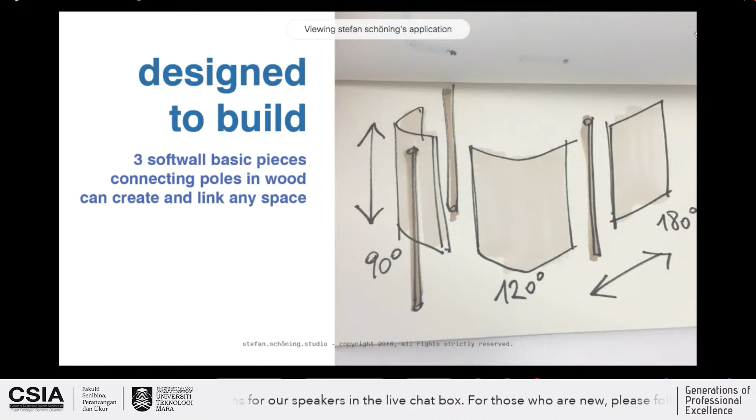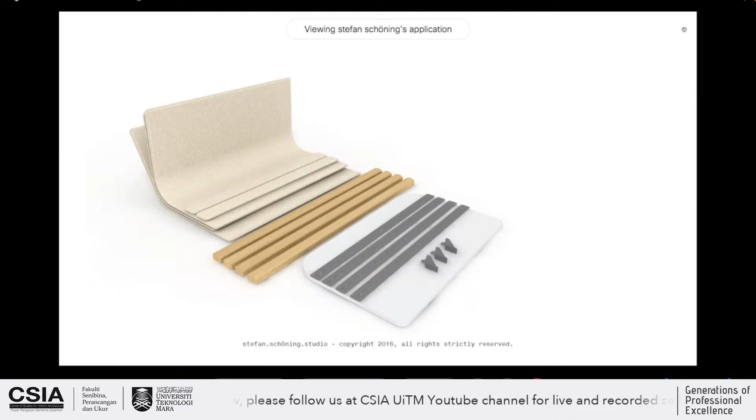Meaning that we made a system of soft wall panels, basic pieces in three forms, which can be connected with poles in wood, especially local wood, and then they can create any link in any space. So in the end, we came up with this kind of result, which looks quite easy because the basic forms are simple, but the result can be any kind of configuration.

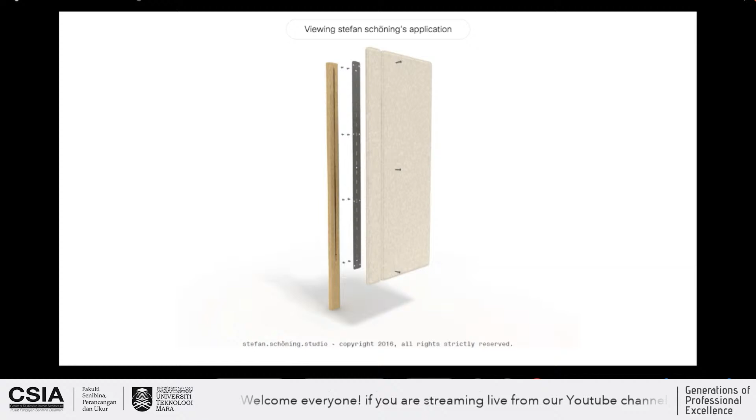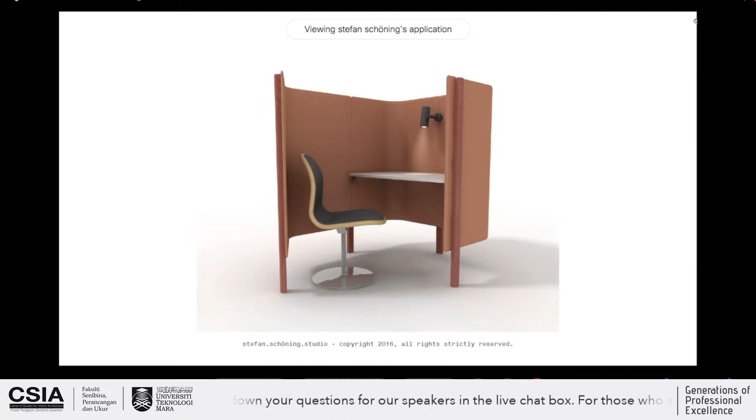This is the more technical part which we'll look at deeper in another presentation. As you can see, with the simple connection of an intermediate panel, we can connect all the pre-made pieces into a shape of a small breakout place, or maybe another color, or with a lamp, or with a stool, or a separate space, or a bigger space, in order to make a meeting or a presentation. So the principle is connecting different panels, straight panels and corner panels, into architecture.

The material for the panels, as I told you, sustainability is becoming much more important in the coming years and decades. We definitely try to find a material which is recyclable or even recycled already. For the soft panels, we found a material made from collected PET bottles, which are sorted and shredded, then needle punched into a non-woven insulation system. This is interesting because you can put it in a variety of different colors. It's environmentally friendly, lightweight, has a soft touch, and last but not least, good noise insulation.

For the wood, we think of course of local wood in Malaysia, which can be very attractive. We thought of Nyatoh wood. Nyatoh is a trunk which goes up to more than 3 feet in diameter, which is interesting to get straight pieces we need to make the connections, and it's a wood which is very regularly sourced in Malaysia.

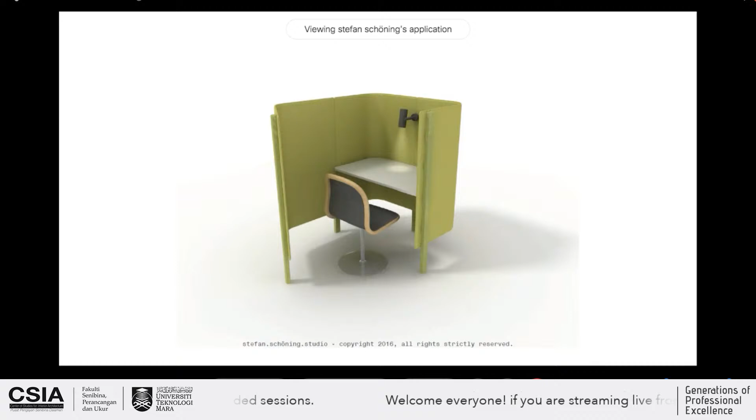So now, as you can see, we can make a connection between the different pieces and connect it to a bigger space, or another configuration with other connections, other colors, other functions. In the end, we came up with a whole different process of solutions for the office.

If we can go to the next presentation, it will show you the way it all came together. Do you see the presentation? Yes, we can see. Okay, sorry, just to check.

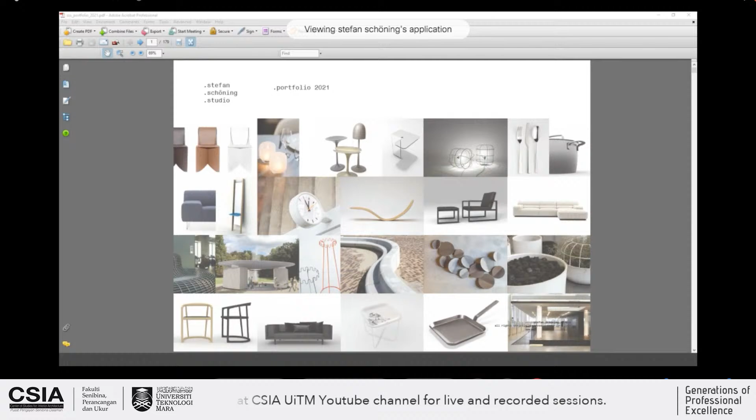So this is the same company. This was the briefing. As you can see, it's already 5 years ago, so some of us will be looking a bit more mature in the picture. The first thing we do is look into the company and get the briefing from the owner with his ideas. Then the first step we always do is take a deeper look into the company itself, to see what kind of machinery and process they have.

Sorry to interrupt, I think you're not showing the correct image. Let me check. I think the one that showed is correct. I'll go back then. Okay, yes, okay.

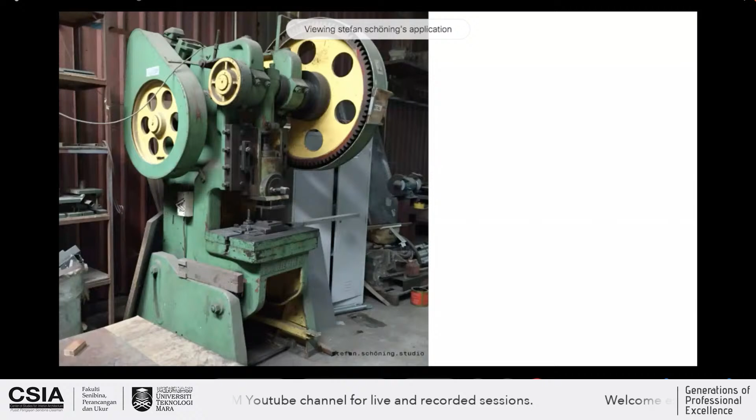So this is the start. The first thing we do is make a proper visit to the company and listen to what the owner has to tell us about his ideas for the briefing. But most important is that we take a deeper look into the production capacities of the company, what they can do in-house, what they can do out-house, and then we come up with the idea. We make a presentation, which I will show you in the third presentation of this zone.

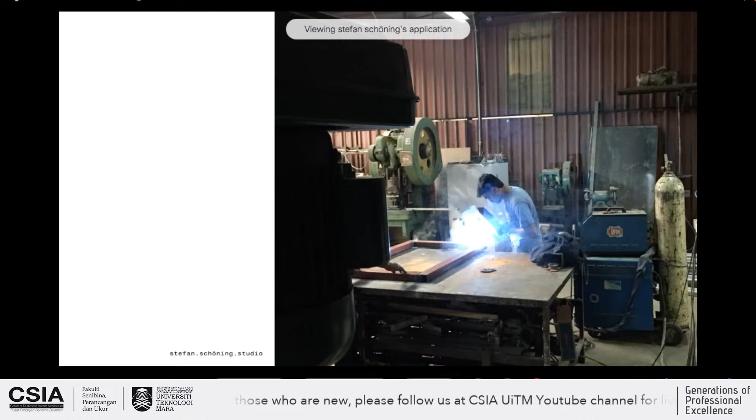So we make the technical drawing, the renderings, the technical details. Quite important in this situation, we make the sampling. Sometimes we use pieces we find on the market and integrate them, but sometimes we need to make our own pieces like this one, made in the company itself. So it's always a mixture of own production and supplying. The supplying mostly comes from the country itself, though sometimes the polyethylene fleece material comes from China. As you can see here, we started making the mock-up, the first tryouts, then made choices in the colors for the presentation at the fair, making the sampling of the panels, and finally the presentation at the fair.

So in the same way, I want to show you the presentation of how we came to the idea.

And what is this? What do you see at the moment? It's a white screen. I'm trying to.

Okay, you can see it. Can see, can see.

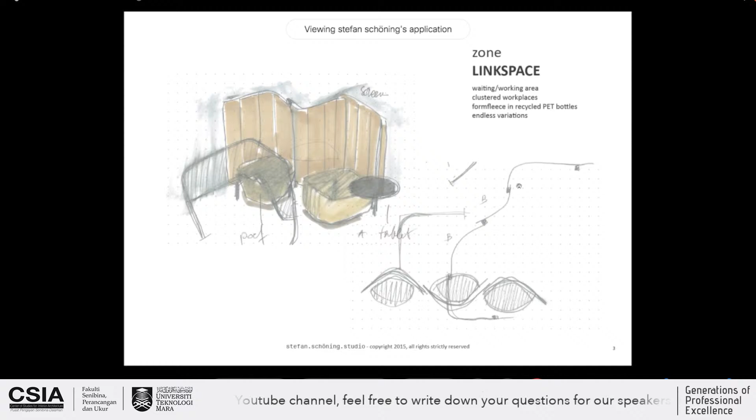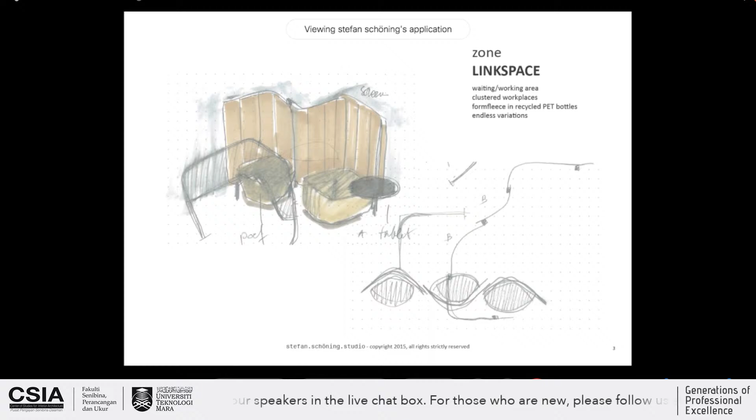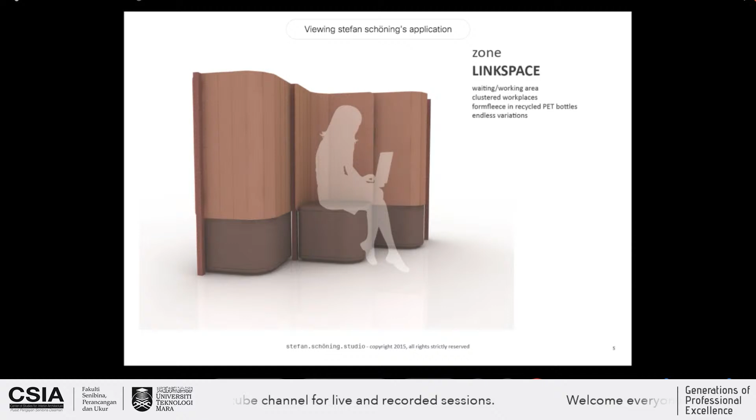So what we do is this is the result of the briefing we had earlier, and then we'd start to make the sketches. So all the way through, what I do today is go from the end result to the beginning, just to give you an insight of how we come to the result in the end. So in the first sketches and ideas, we were making these kind of sketches and presentations. And it's very important to get a very hands-on discussion with the client in order to see if what he has been doing in the briefing is one-on-one with what he has in mind.

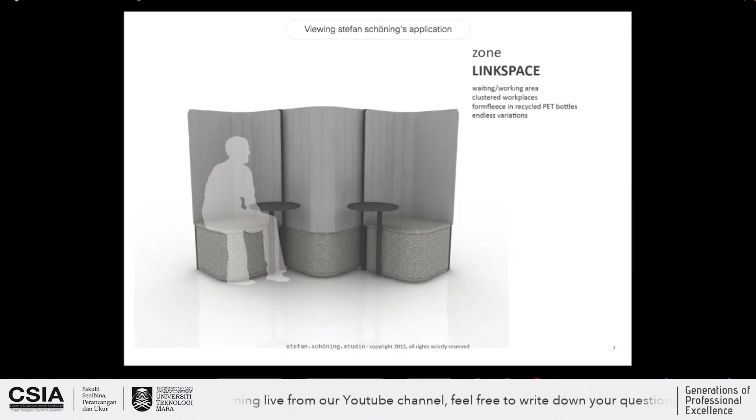Sometimes the briefing can change because we can have insights in the market or have discussions on market studies, which will result in a change of the briefing. But in the end we came up with a system which is kind of what we saw in the final presentation.

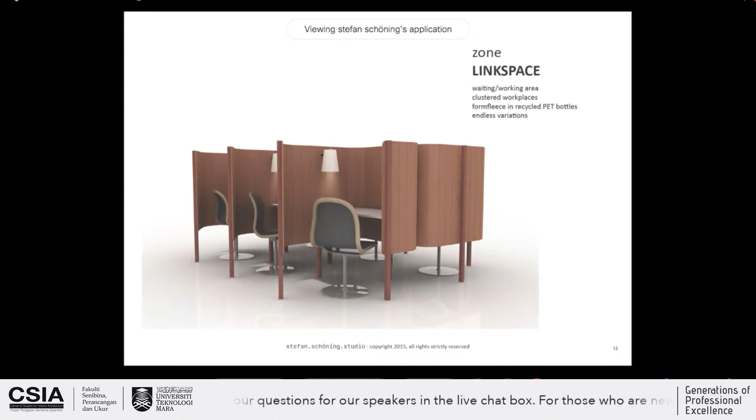Okay, do you have any questions on this, please? Because otherwise we will go and continue with the next.

I think what inspired you to use the Malay house as part of your design process? Actually, I was looking to make a panel system, which is a small kind of architecture in the office environment, and I wanted to make it lightweight in order to not overwhelm the interior design of the office, so that the panels can be mounted very easily.

And in order to find a formal solution, this is the right side of the brain, is about emotions and about inspiration. I was looking into the history of the Malay architecture, and what is very typical is that the Malay house on poles is different in any part of Malaysia, but it's always on poles.

So the thing is that the basic idea is applicable to all the regions of Malaysia, because the system of ventilation is the main cause, or the main reason, to put it on higher poles. And this is exactly what I wanted to do in the office.

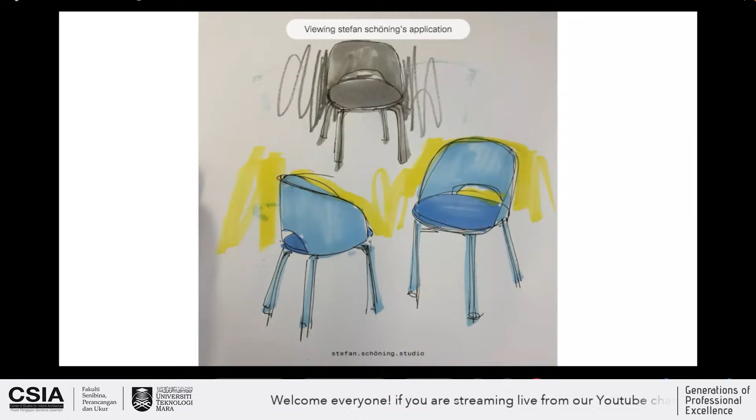So what was very important in this project was to make the curved piece connect to the seat without any visibility of screws, etc. This was the main challenge, let's say. The second challenge was that this kind of company only makes chairs which are knocked down, meaning the seat and legs should be disconnected and put into a smaller box to reduce shipping volume.

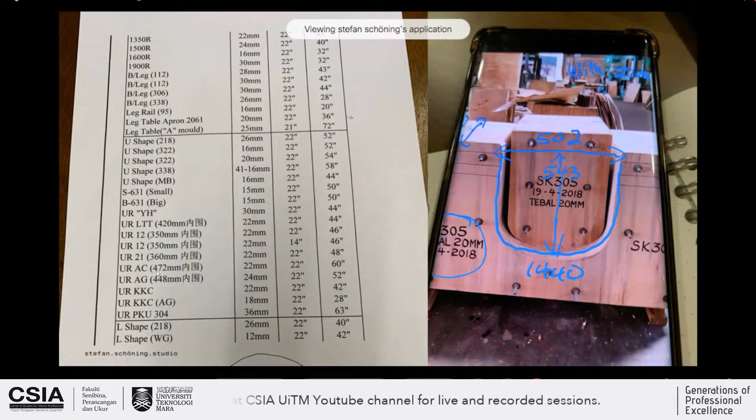So this is the result we came up with, the renderings and the product presentation. And we also make a presentation for press releases before the product is finished. So what we did is look into the data of the company making the curved pieces, and we picked out one or two that could be applicable for what we need.

And then we started making the CAD drawings in order to develop the right DXF files. We make the color scheme choices, and of course sometimes you need more clarification on how the invisibility of the connection is done. So this is the way we made the sketch, and then we executed this into the CAD drawings.

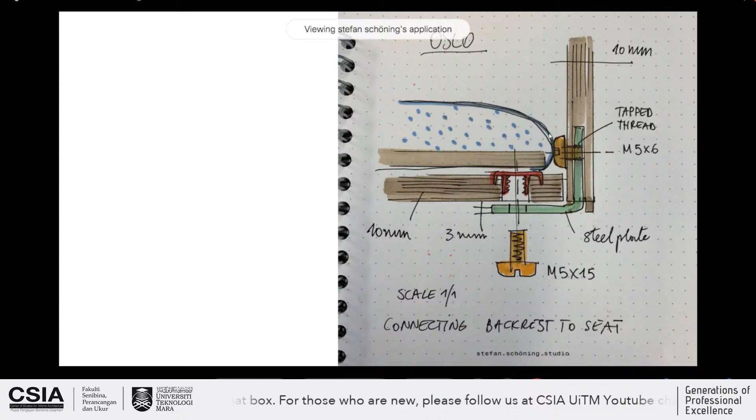So the interesting thing here is that the connection of the back and the side is underneath with a screw and a bolt here, and then the cover of the seating with upholstery comes on top, so you never see the finishing screws.

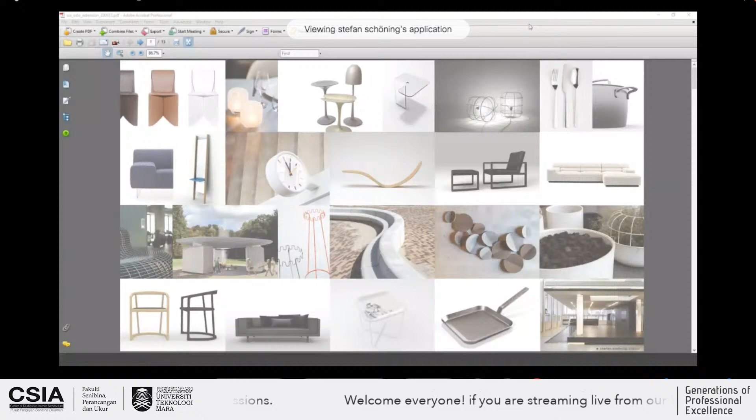What is interesting in this project is that we extended it to a bigger line called Oslo Extensions. What is Oslo extension? The extensions I'll show you immediately - when the product is successful, it's interesting to make a family, meaning a brother, a sister, an uncle, etc.

All right, so this is the basic product, and then we make the table, which is already an extension, then a longer table with different measures, a low table, coffee table, maybe a stool, as you can see here, or a small table and a bar stool - so in different sizes.

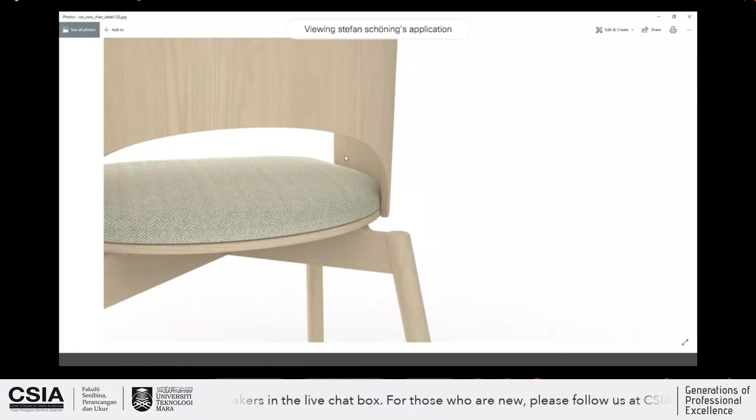This is very interesting because a little detail like this is very simple, yet you managed to do it with our local manufacturer, using a very thin sheet of plywood as the backing of the cushion while having the leg floating. Yes, correct.

I have to say this is the computer rendering; the final result is close, just a little bit thicker. Maybe I can show you the final results.

Let me check. Yeah, I think I have the Dan chair. This one.

To me, this is part of the design detailing that you're creating from your design idea, having it more like a detail design. Correct, the thing is you can see it, the chair. So as you can imagine...

This is the product. Yes, this is the picture, this is not a rendering. As you can see, we achieved quite good similarity with what we designed, and this is the success of the chair, I think, because of its characteristic floating detail, which makes people want to buy it.

That's right, it looks like the whole thing is cantilevered by itself. Yes, and there are different nice colors, and also the way the light comes through and shines on the back is a very nice detail. Also the legs, which are a bit set back, is also something.

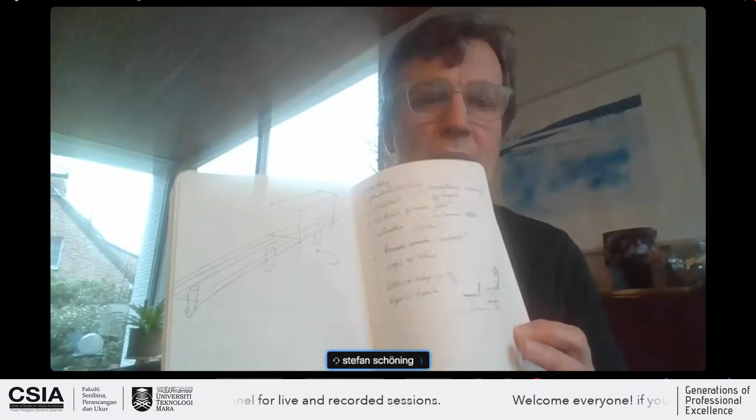This is very assignment related. On the other hand, we do also work from ourselves and come up with ideas, because as a designer you never stop sketching. As you can see here, I have this little book, and I always carry that book with me, and I always try to put the ideas which come up into my mind down on paper. I put them down for a while, and after a while I pick them back up and try to make a proposal. I make them into a full 3D proposal, which goes into a file, and now and then I pick it up and try to find an appropriate client to present it to.

Do you think Malaysian local wood has the potential in furniture design manufacture in the future, perhaps? Yes, you should stop making all products in rubber wood. You have much nicer wood than rubber wood. But the crazy thing I've experienced is that you export the very beautiful wood you have, and then you import wood from Europe, some of it pine, ash, oak. It's incredible, the wood, as though you don't have very nice wood yourselves.

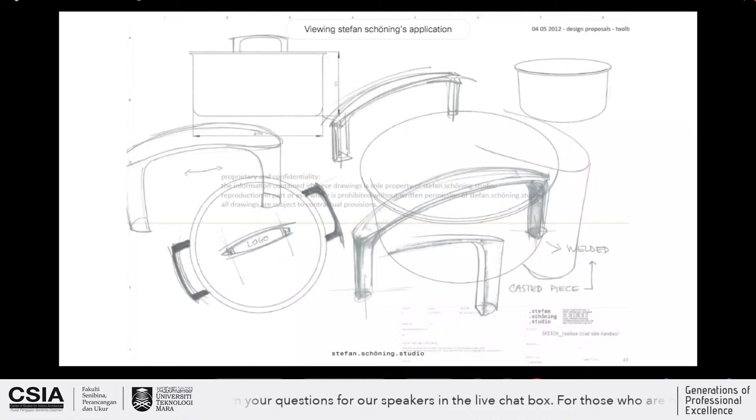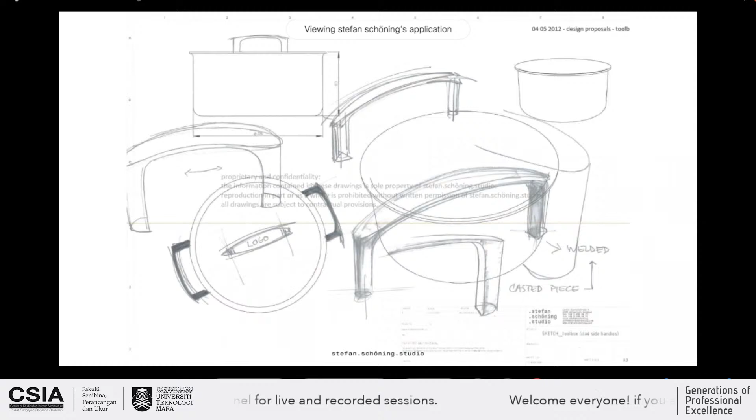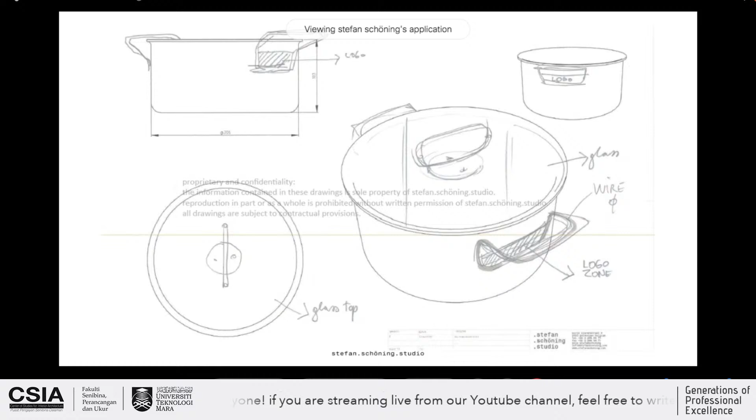Of course, assignments like this start with a brief. The brief was like, listen, we have to make a new series of cookware for this kind of market. Actually this one, which I'm going to show you, I was briefed to make for the Russian market. And you know why? Because the Russian market is keen on having a lid, as you can see here, in glass - they like to see what they cook. So the initial brief was to make a series of handles, pots, steel pans, and baking pans, with a lid made of glass.

The final result was this one. As you can maybe notice, this looks very ordinary. But again, what's typical for the design I make is that the handle, which is normally straight, is here a little bit curved, and it needed special tooling to do this. In the beginning they said no, we cannot make it. And I said, yes, you have to make an investment in the tooling for this.

It's a huge cost because every set of pots and pans has different sizes - they come from 20 to 22, 23 - so every handle needs a different mold. So making these pots was a big cost investment. But the final result is this cookware piece where you can see the handle has a nice elegant curve. Actually, we didn't end up selling it in Russia, but we sold it worldwide, and they've sold millions of it.

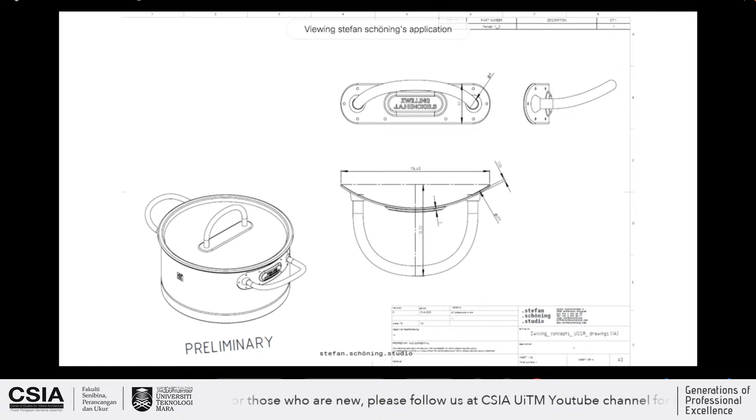So it's quite unique to have the handle longer than is normally done in ordinary cookware.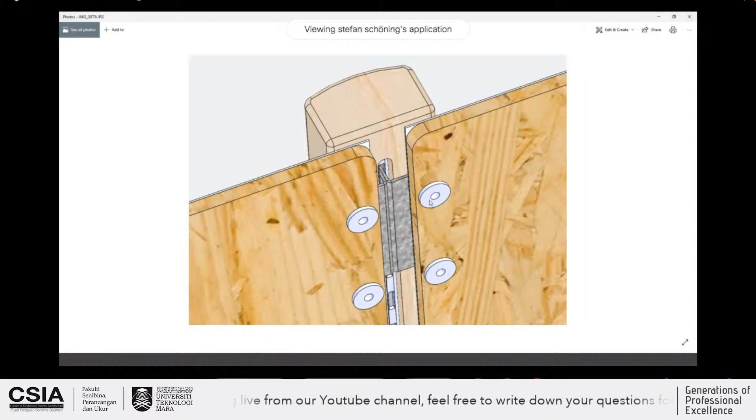Yeah, I think this method is called the prong system. This is the detail, can you see it? This method is called prong system, right? Yeah, this is the metal piece with hooks.

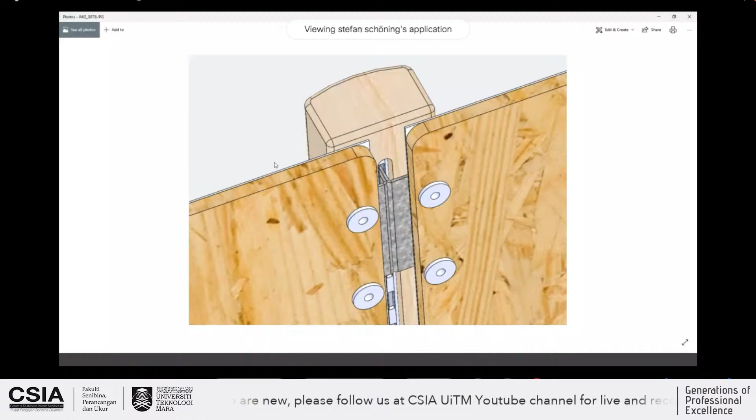This part comes covered with the fleece. So these hooks, they stick out, and you can hook them together into the beam. So the hooks are invisible because they are hidden between the felt and the panel. You see, this is the back - this is one part, and this is the other, and the hooks come inside here.

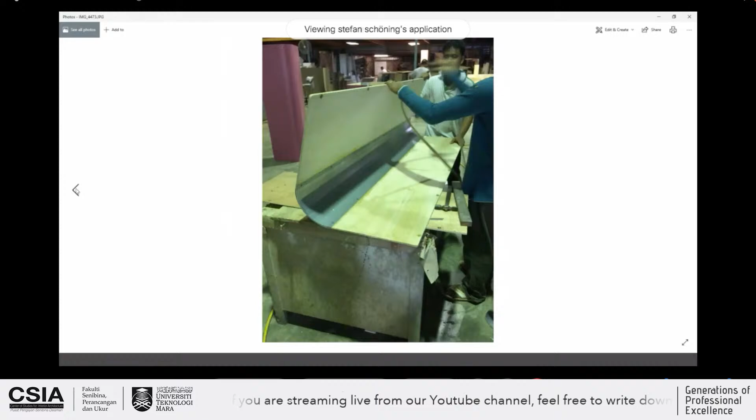It's a pity we didn't succeed in continuing the project. So it's still open for manufacturing, if you know anybody.

Okay, here you can see the detail - this is the hook going into here as well. Yeah, it's actually a simple detail, but it was very nice, it was really well executed.

Very interesting. It needs more studying because sometimes it was a bit wobbly, etc. But after all, it was a first prototype, so we can really go on and continue making it more elaborate.

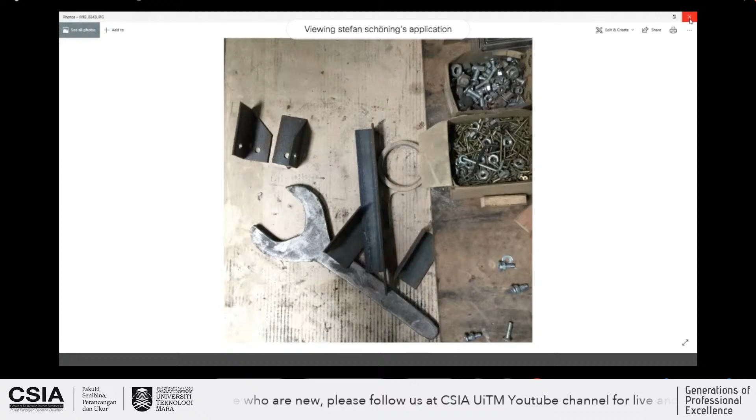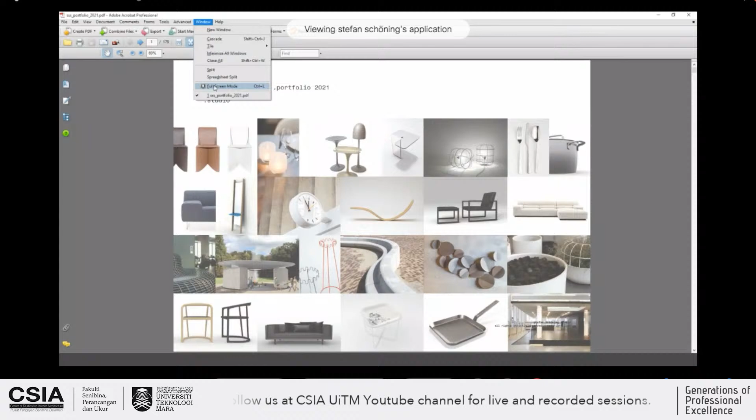That's a difficult question because I like to do different kinds of things. I can share the portfolio I have here, which you can also download from the website, and you can see on the first page the overall products - you see I did these kinds of products, because what is interesting in this product and this product, this is a coat hanger and this is the lamp.

The nice thing about it is that it lasts - this coat hanger has been selling for the last 15 years. And the specific coat hanger right there, yes, this one, for the Italian company, and it hasn't been copied, luckily.

But the nice thing is that it has been selling for the last 15 years, and of course the income of a designer is as important as the satisfaction of what he designs and creates. But when it comes together, it's always nice.

But another project is this seat, as you can see here next to it - it's actually not a seat, it's a wall which we did for coastal defense, for the rising sea. So this is a product related to the public, and that is also very satisfactory, since the product is designed for Mr. Nobody, meaning you don't know the client.

If you sell cutlery, you always have people who say, 'Oh, I have seen this cutlery and I would like to buy it, can you inform me about the manufacturer?' So that is very nice, so that you have an idea of who your clients are. But in public design, you never know who you're designing for, and this is quite nice as well.

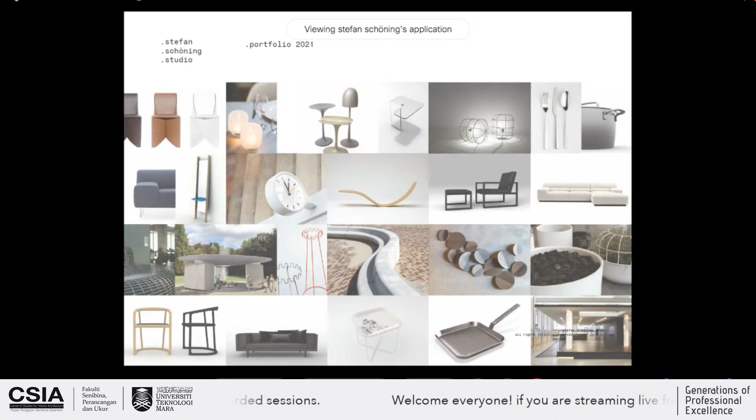Oh, all right, because that kind of exact thing you mentioned - like the wall you mentioned about, it's more like a coastal defense, right?

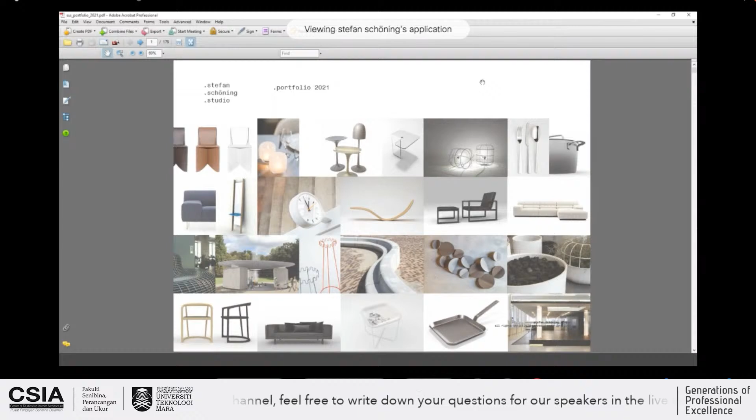It says more or less like coastal defense. Yeah, correct. But I feel like the more people use it, it reminds me more of a seating concept. Because you normally see those in public parks around the world, especially here in Malaysia as well. We've seen a lot of those. So that's my take on it.